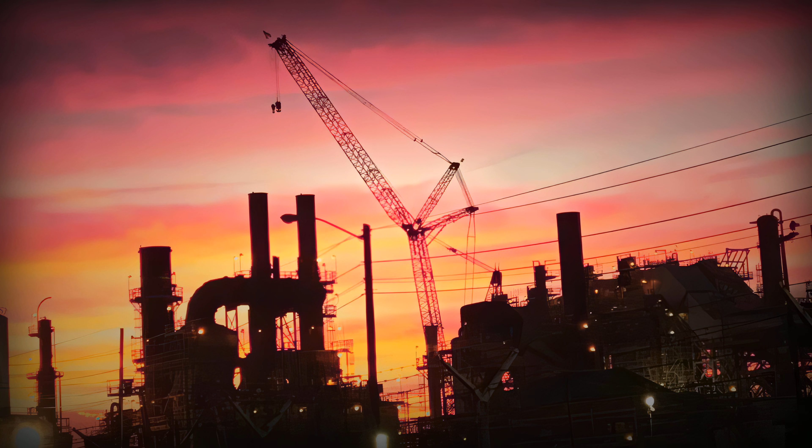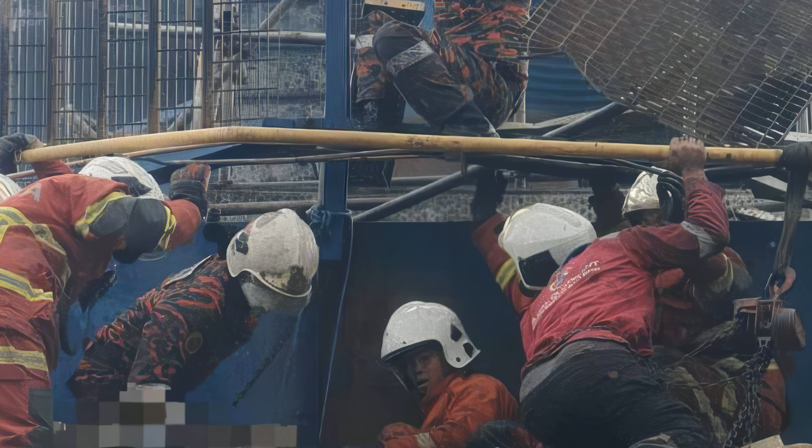December 13th, 2025. Routine maintenance at Malaysia's €1 billion power hub becomes an emergency when a coal-handling crane collapses, trapping 5 workers in a tangle of steel. 2 are killed, 3 are rushed to hospital, and a vehicle at the scene mysteriously ignites.

In a country where workplace deaths have surged almost 14% in 1 year, was this just a terrible accident, or the unmistakable sign of a deeper national crisis? The truth begins with a rescue operation where every minute exposes a new layer of unanswered questions.

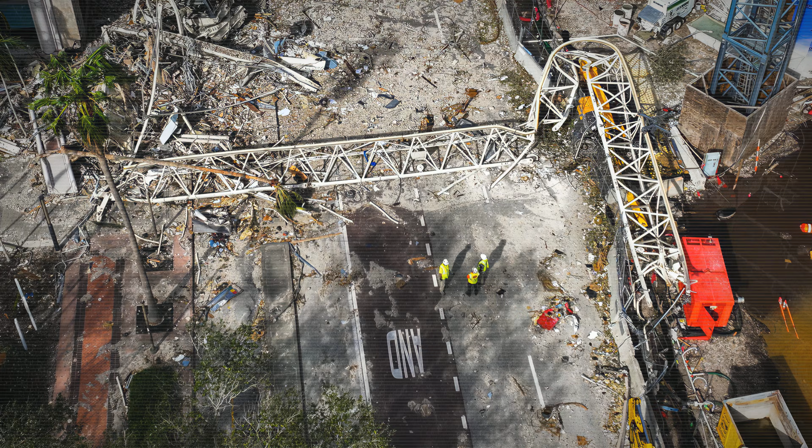The collapse sent a shockwave through the Tanjung Bin jetty, twisting steel into a maze that trapped 5 men where they worked. Alarms triggered, and within minutes Malakoff's emergency response team joined the first wave of firefighters from Pontian Baru and Pekan Nenas. The official record clocks the operation's start at 1 p.m.

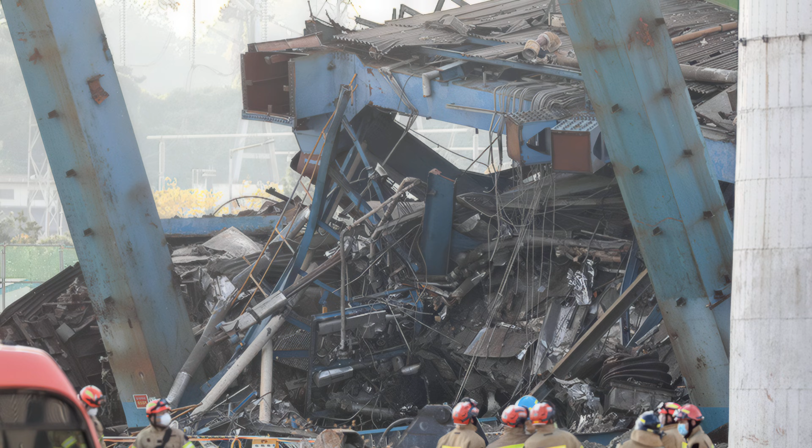15 responders split their focus, some racing to contain a small blaze flaring near a 4-wheel drive vehicle, others hauling cutting equipment toward the tangled wreckage. Every step was a calculation: where to cut, how to shore up beams threatening to shift, how to reach the men pinned beneath the crane's collapsed boom.

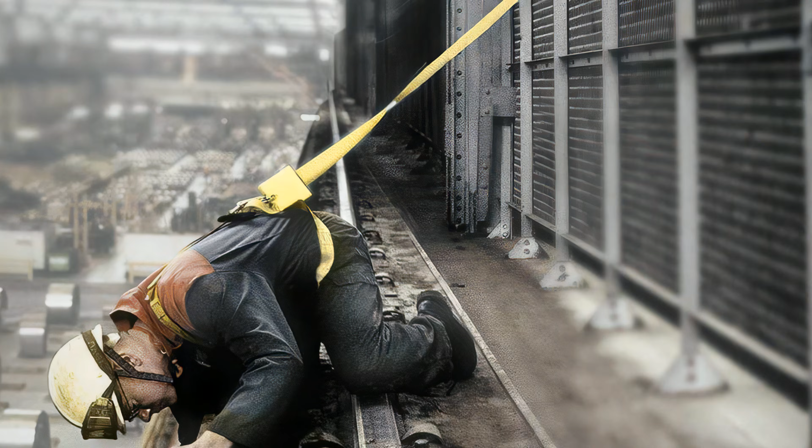Heat radiated from both the fire and the sun. Coal dust hung thick in the air, mixing with the smell of scorched rubber and diesel. The steel, still under tension, groaned as responders worked their way inward, aware that a single misstep could trigger a secondary collapse. Hydraulic cutters and saws bit through beams designed to withstand hundreds of tons. Progress was slow, measured in centimeters and minutes.

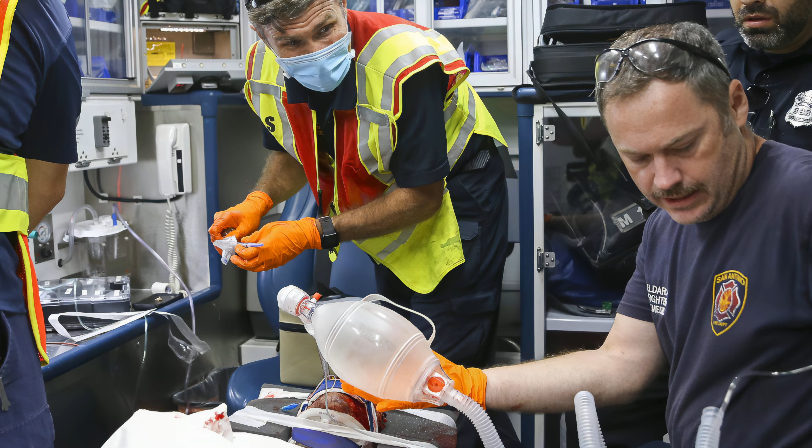By around 3 p.m., after hours of coordinated effort, 2 bodies were recovered from the heart of the wreckage. 3 others, alive but badly injured, were stabilized and rushed to Pontian Hospital. The operation stretched on for more than 4 hours, every responder knowing that the difference between life and death hung on their next move.

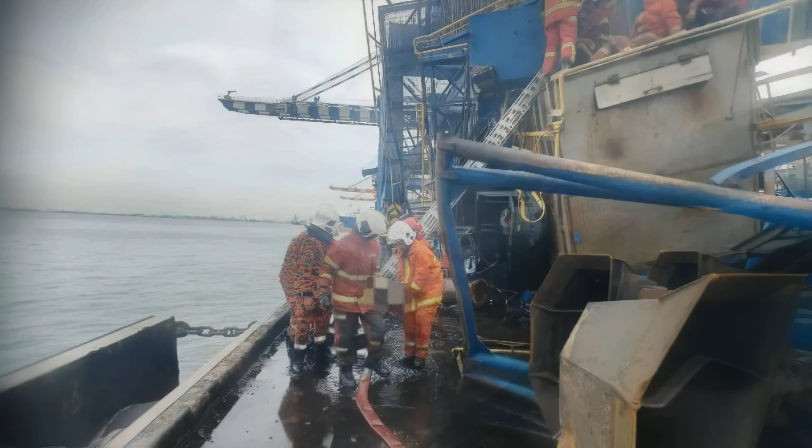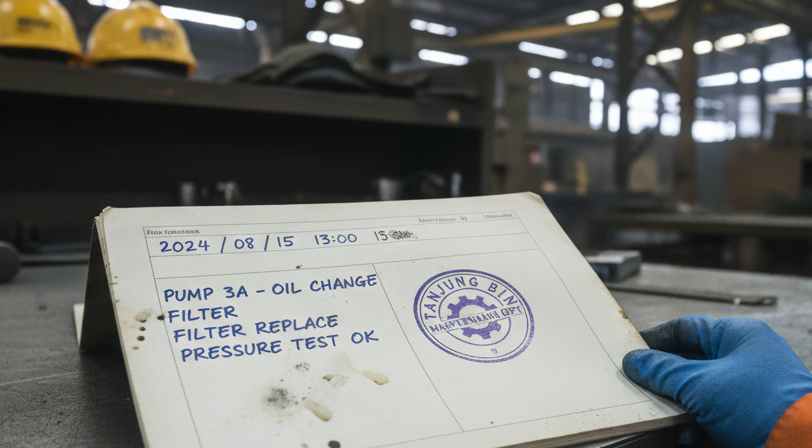What happened in those hours is logged in incident reports, but the questions they faced about speed, safety, and the unknown risks hidden in the steel remain unanswered in the public record. Official records set the operation's start at 1 p.m., but the timeline leaves gaps that investigators are still working to fill. The collapse and the emergency response blur together in the logs, alarms triggered, and teams mobilized. Yet the precise minute-by-minute sequence remains locked inside internal reports and CCTV hard drives.

What is known is this: as the steel gave way, a 4-wheel drive vehicle parked near the jetty erupted in flames. The fire was contained during the rescue, but the cause remains under a separate active investigation by the Johor Fire and Rescue Department. Senior Fire Superintendent Muhammad Amaluddin Hisamudin confirms that his team is finalizing a report focused solely on the vehicle blaze, probing whether it was sparked by falling debris, a ruptured fuel line, or a shorted electrical system.

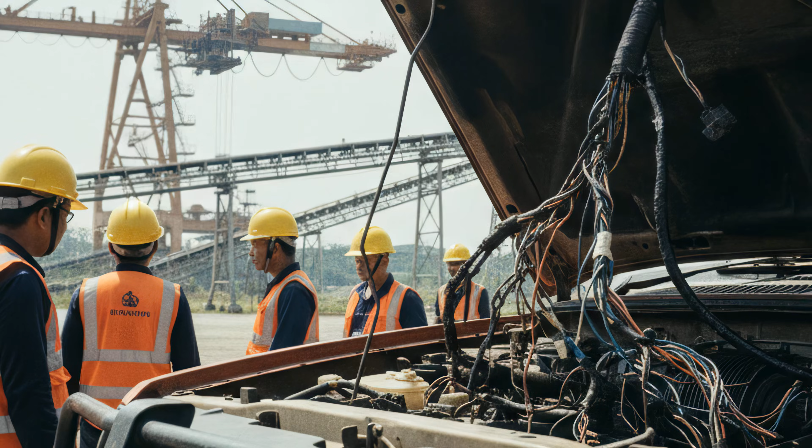The fire's timing, during the collapse according to the Johor Fire and Rescue Department, raises questions about the accident's complexity. Was the vehicle fire a symptom of a broader electrical failure? Or did the chaos of the collapse trigger a chain reaction no one anticipated? For now, the ignition point and its connection to the fatal crane failure remain unanswered.

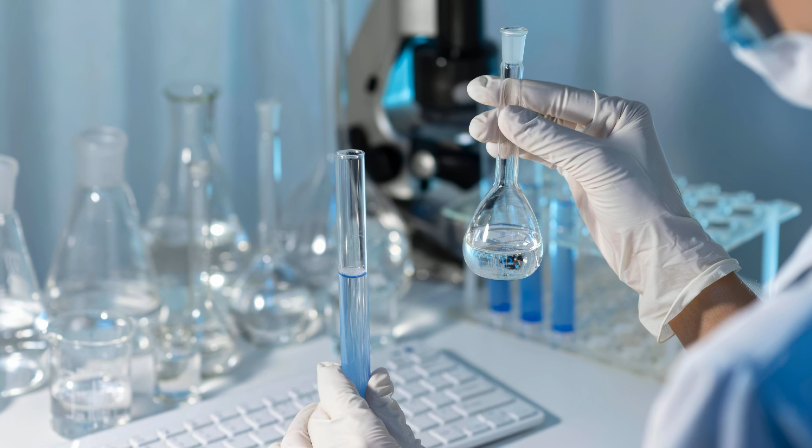What is clear is that the investigation will require a careful review of control system logs, forensic fire analysis, and maintenance records to piece together what happened in those missing minutes. The search for answers continues. The logs and black boxes may hold the clues to a sequence that cost 2 young men their lives.

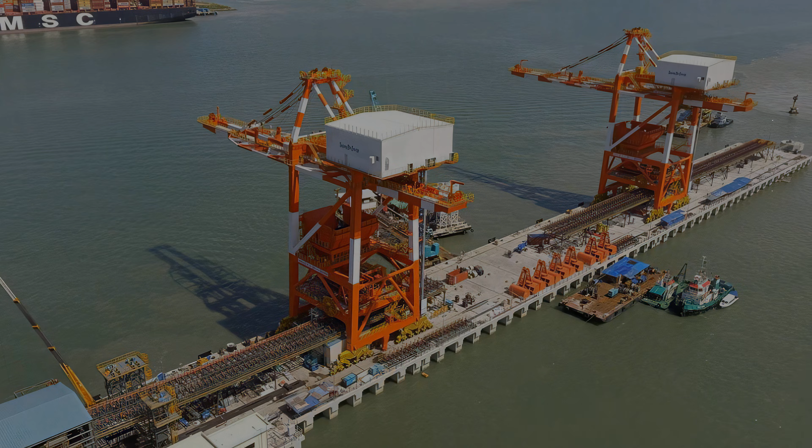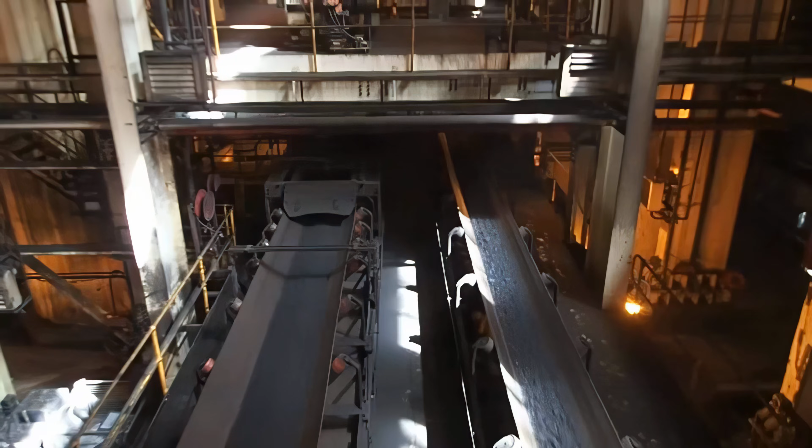On the Tanjung Bin jetty, the coal-handling crane was the critical link between ocean and boiler. Every hour, hundreds of tons of Indonesian coal moved from ship holds to conveyor belts, feeding the plant's appetite for fuel. The crane's portal frame ran on rails above the water, its boom swinging out over cargo vessels and lowering a grab bucket into coal piles that could weigh more than a fully loaded city bus.

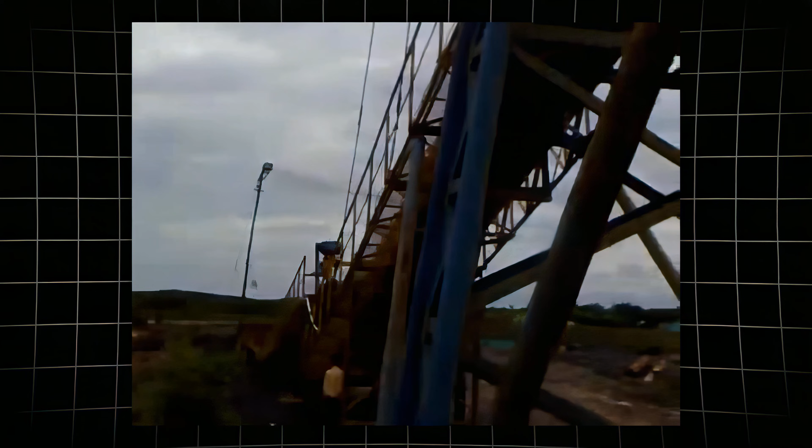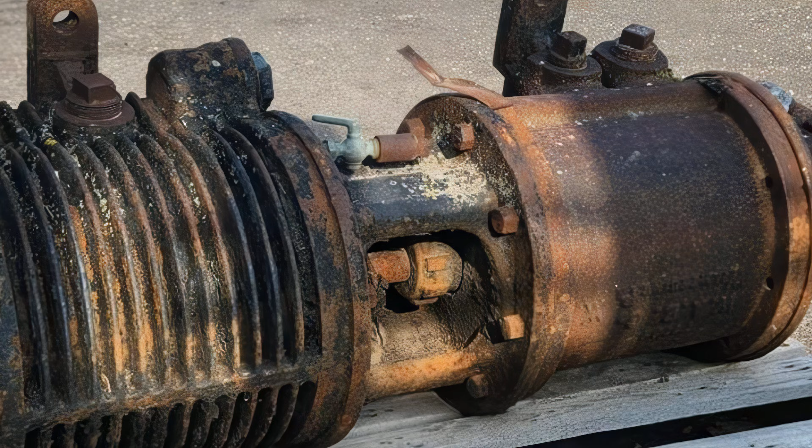In theory, the system was built for relentless work, with steel girders, heavy-duty drives, and control circuits designed to keep the coal moving without pause. But the environment fought back. Salt-laden air from the Johor Strait coated every exposed surface, seeping into welds and joints, while coal dust settled into crevices, holding moisture against the metal like a corrosive blanket. Over years, this constant assault weakened protective coatings and attacked the steel beneath.

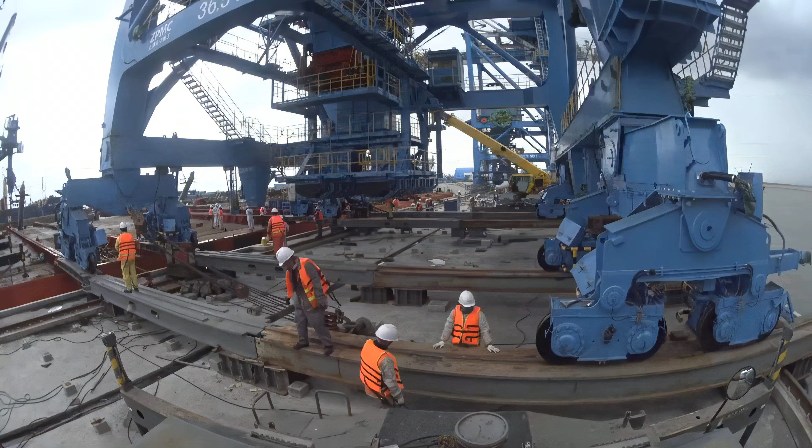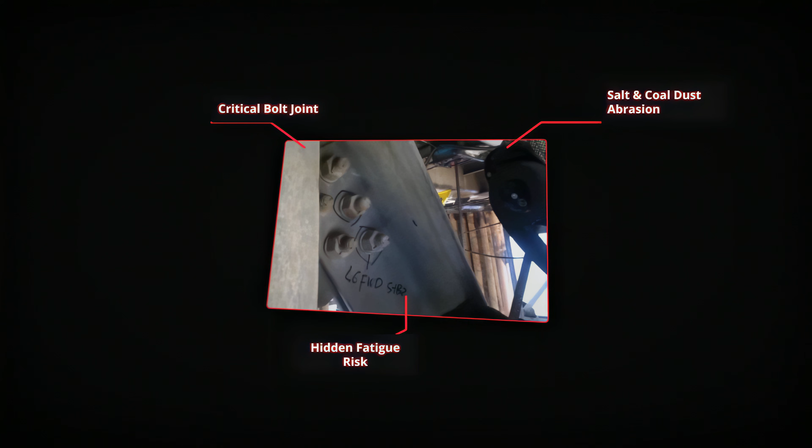Routine maintenance meant climbing high above the jetty, surrounded by abrasive dust and humidity, trusting that every bolt, cable, and weld could withstand both the plant's demands and the unforgiving climate. In this setting, the crane was not just a machine.

It was a lifeline under siege, where any overlooked defect could threaten the entire fuel chain. Every crane collapse leaves behind a trail of evidence, some visible in twisted steel, others buried in system logs or maintenance paperwork. For engineers, three broad pathways define the diagnostic map.

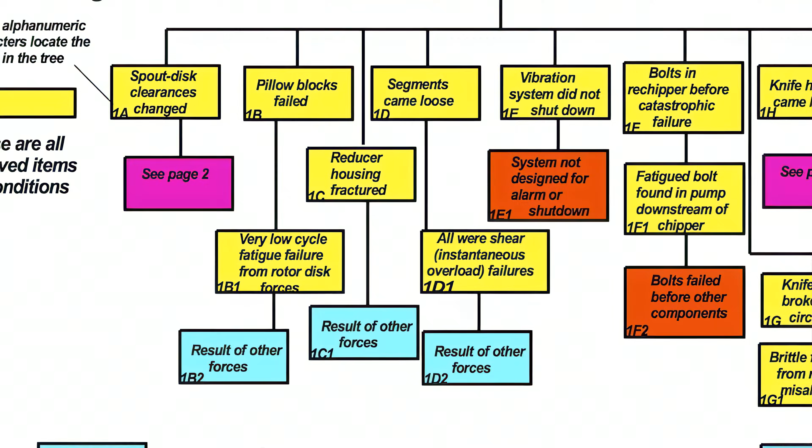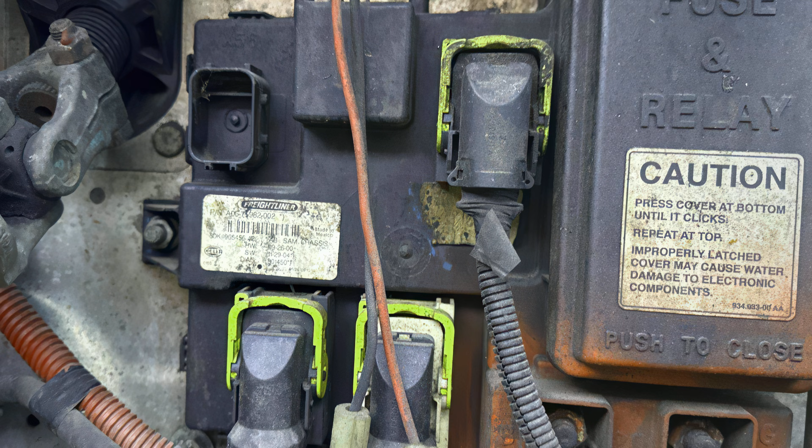The first is electrical. Insulation breakdown in humid, coal dust-laden cabinets can let current jump where it should not, igniting fires or triggering uncontrolled motion. Years of moisture and dust corrode relay contacts and cable sheaths, raising the risk of a short circuit, especially if safety interlocks are bypassed during maintenance.

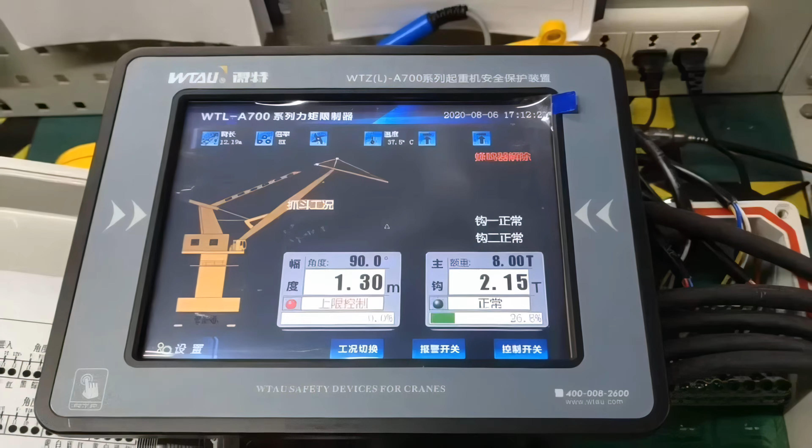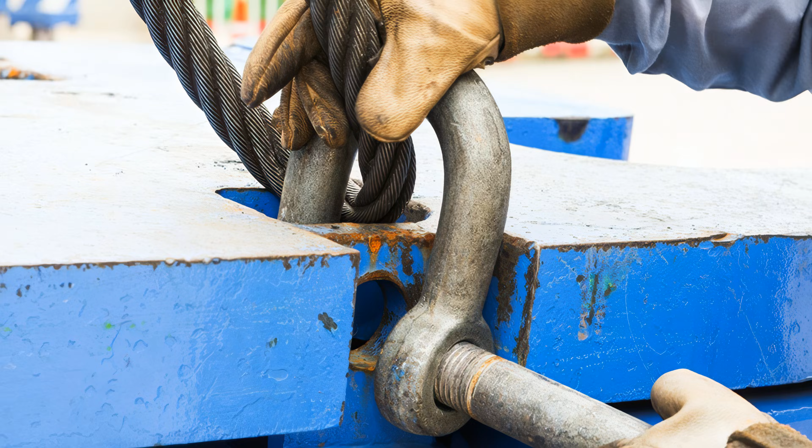The second pathway is procedural. Lockout-tagout is supposed to isolate all energy sources before anyone climbs the structure. But global case studies show that under time pressure, steps get skipped. Motors are left live, brakes are released, or safety pins are pulled in the wrong order. Even a momentary lapse can let a machine move unexpectedly, turning routine work into disaster.

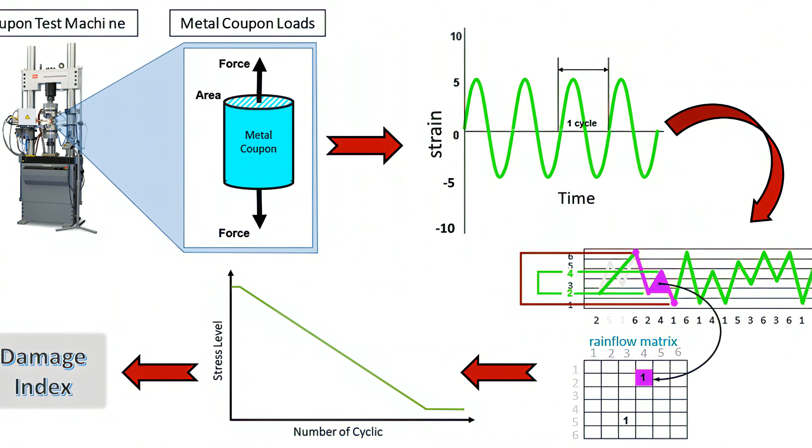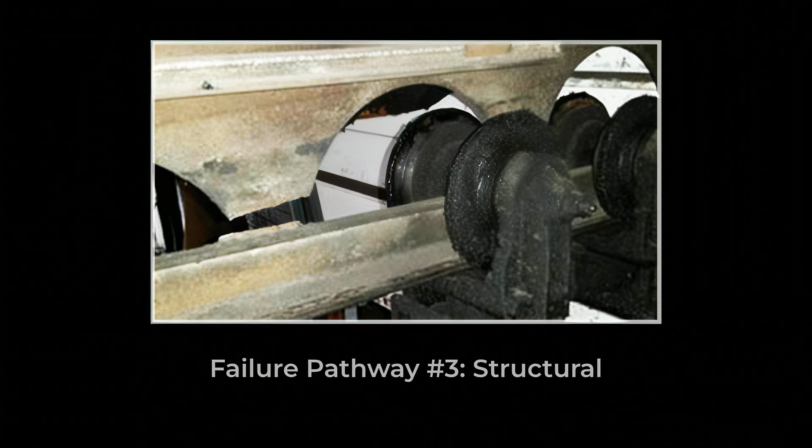The third is structural fatigue. Welds at boom to portal joints absorb millions of load cycles over years. Coal dust and salt air attack every exposed surface, thinning critical sections and hiding cracks until a sudden overload or maintenance-induced imbalance pushes steel past its limit.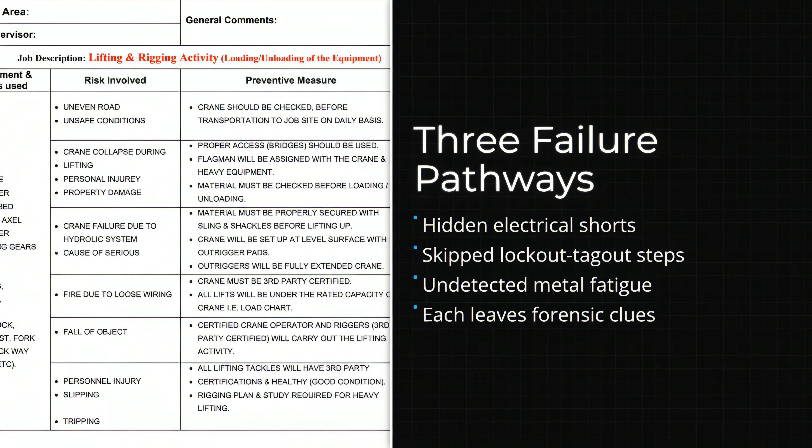Investigators now face a checklist. Was it a hidden electrical fault, a procedural shortcut, or metal that simply gave up after too many years at the front lines? Each failure path leaves clues, and only a systematic probe can distinguish accident from inevitability.

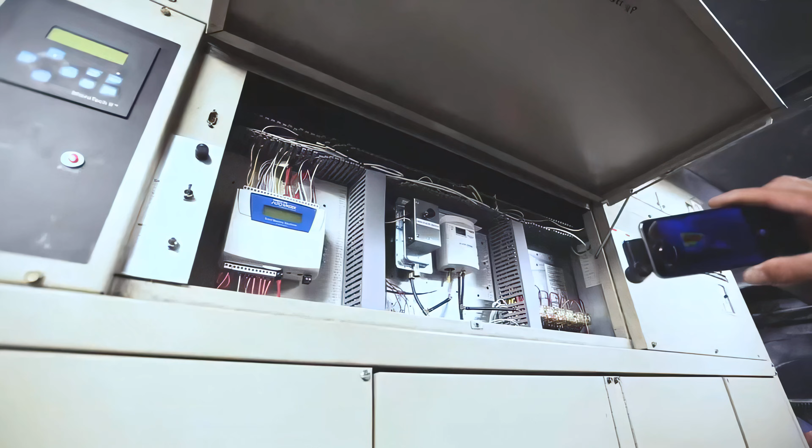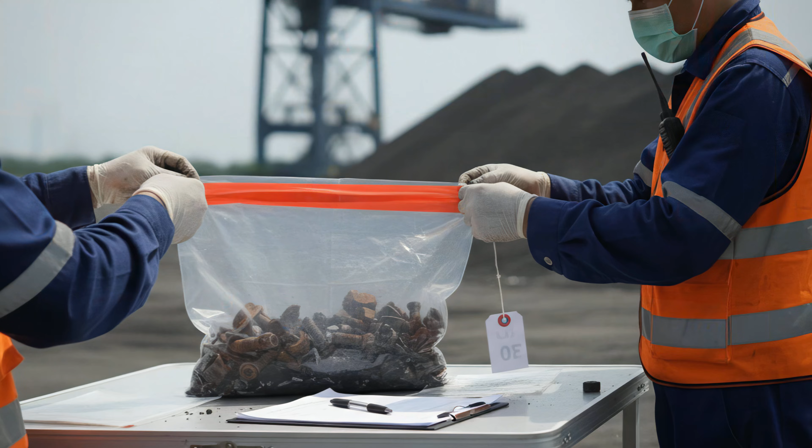A real investigation starts with evidence, hard data, not speculation. Every control log from the crane's programmable logic controller must be downloaded, imaged, and preserved. These logs capture the last commands, interlock bypasses, and alarm signals in the seconds before the collapse. Next, investigators need a complete chain of custody for every fractured steel specimen, bolt, and weld segment pulled from the wreckage. Each sample must be cataloged and tracked from recovery through testing.

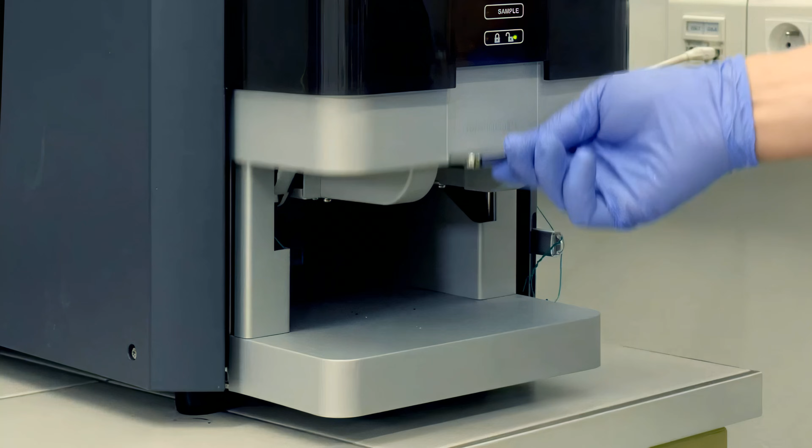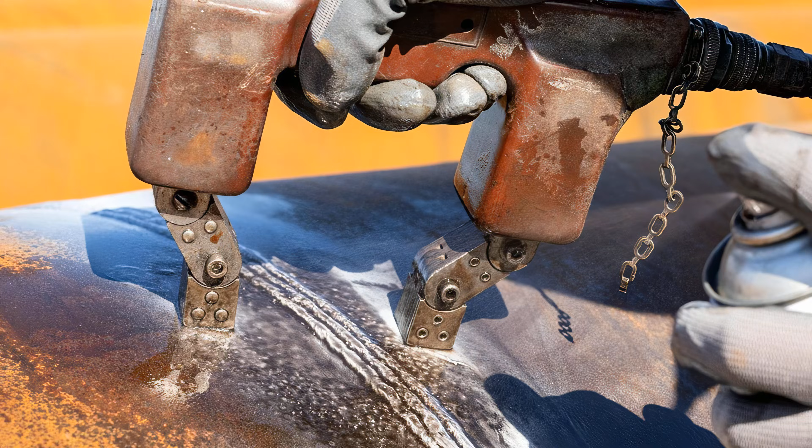Metallurgical testing, including scanning electron microscopy, hardness profiles, and chemical analysis, should be performed on each sample to determine if fatigue, corrosion, or brittle fracture played a role. Non-destructive testing maps, including ultrasonic and magnetic particle scans of surviving structural members, are essential to reveal hidden cracks or section loss.

All maintenance records, permit-to-work forms, and lockout-tagout checklists must be released, along with closed-circuit television footage and radio logs from the control room. These operational records show how the work was planned, authorized, and executed. Without this full catalog, programmable logic controller event logs, specimen test results, non-destructive testing defect maps, and documented custody, there can be no credible root cause report. Transparency demands that these artifacts be made public, not just summarized in press releases.

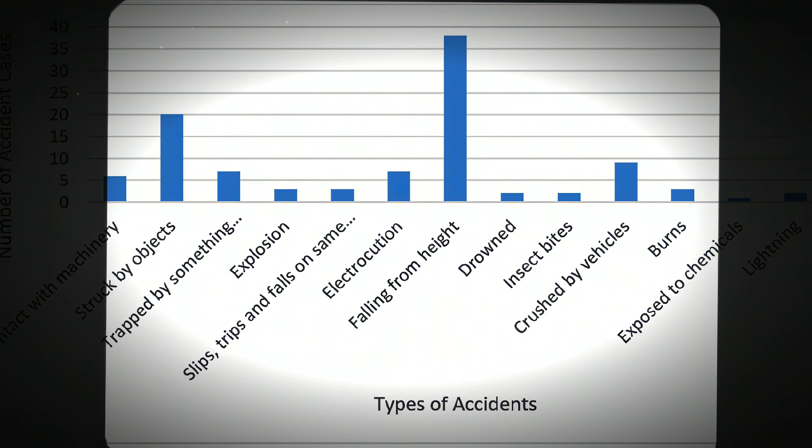Malaysia's Department of Occupational Safety and Health responded within hours of the Tanjung Bin collapse, issuing 2 formal notices that froze activity at the jetty. All crane-related work was prohibited, and the accident site itself was sealed for forensic examination. Under the Occupational Safety and Health Act of 1994, employers found liable for safety violations face fines up to 500,000 ringgit, or 2 years imprisonment. These penalties are rarely tested at the upper limit, but the law sets a clear threshold

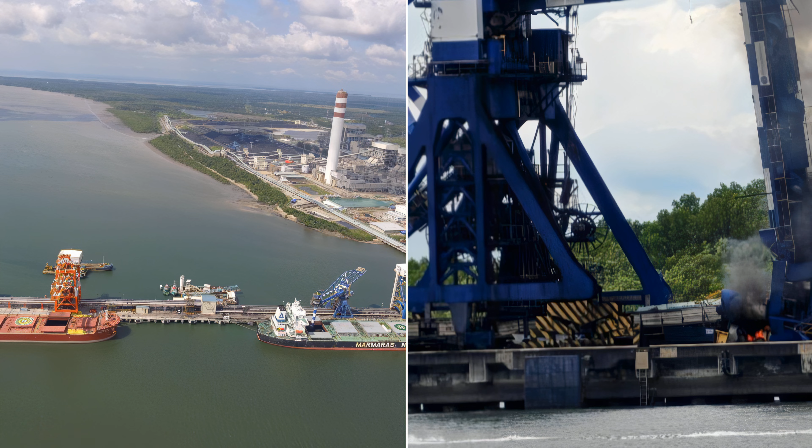for accountability. Deputy Prime Minister Datuk Seri Fadillah Yusof publicly demanded a thorough and transparent investigation, instructing the Department of Occupational Safety and Health, known as DOSH, the police, and technical agencies to cooperate fully, and promising consequences for any breach of safety protocols. The regulatory response at Tanjung is not just about this single accident. It reflects a system under scrutiny, where the balance between national infrastructure and worker safety is measured in both legal notices and lives lost.

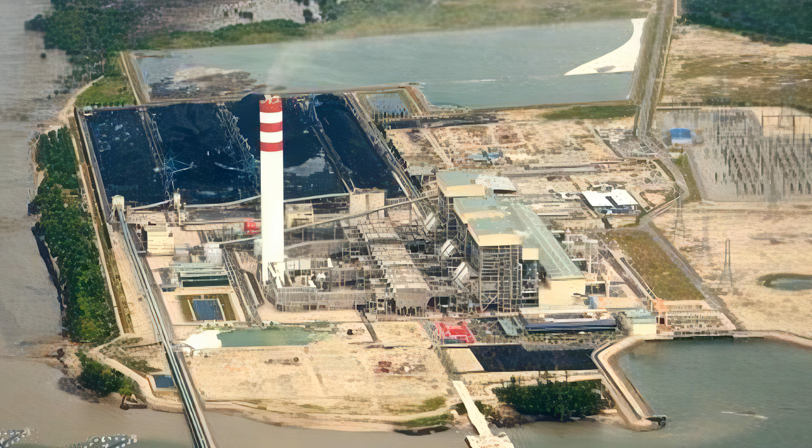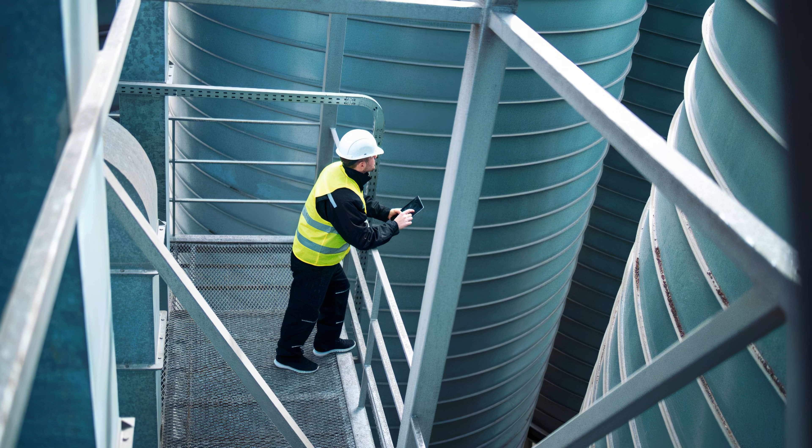Families waited for news outside Pontian Hospital, hoping for answers that have yet to come. Muhammad Alfarid Ahmad and Muhammad Amaluddin Hisamudin were not direct employees of Malakoff, but subcontracted workers, young men whose contracts often meant less training, fewer protections, and little say in the safety systems around them. Under Malaysian law, their families may receive up to 266,000 ringgit in statutory compensation, but no sum replaces a son lost at 19 or 22.

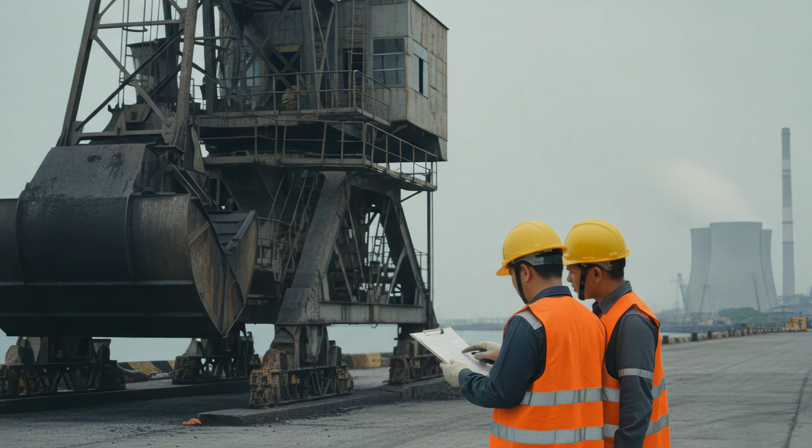As flowers and prayers mark the site, the official findings from DOSH and the fire department remain unreleased. The causes, whether a missed inspection, a procedural gap, or a deeper flaw, are still locked inside forensic reports and internal records. For the families, for safety advocates, and for every worker who steps onto a high platform, the wait for truth is not over.

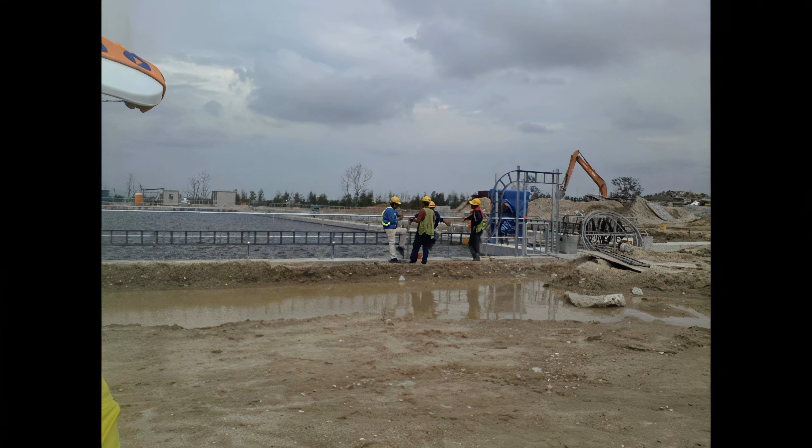Today, Malaysia's workplace death toll keeps rising. Over 38,000 accidents were reported last year alone. Modern engineering means nothing without a real safety culture and consistent enforcement. Until accountability is enforced at every level, billion-ringgit investments still cost human lives. The question is, how many more before that changes?